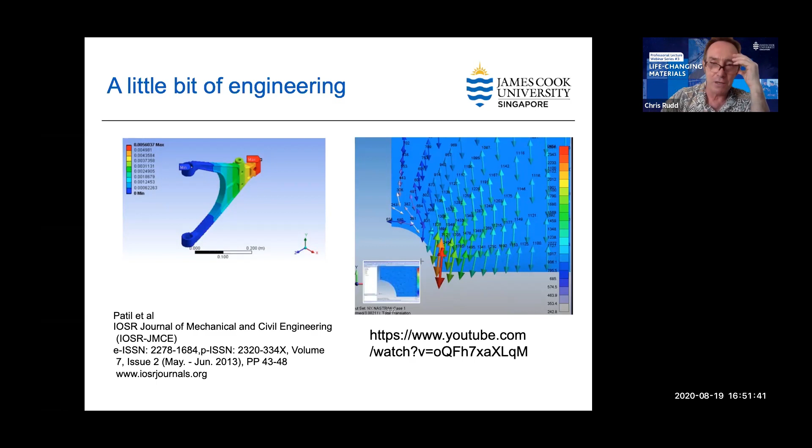It led me to completely change my technical interests from thermodynamics, which I'd been working on before, to these kinds of materials, fiber reinforced materials, where you played around with the direction of the fibers to change the properties of the material. It felt to me like, as an engineering designer, you were playing God with your material.

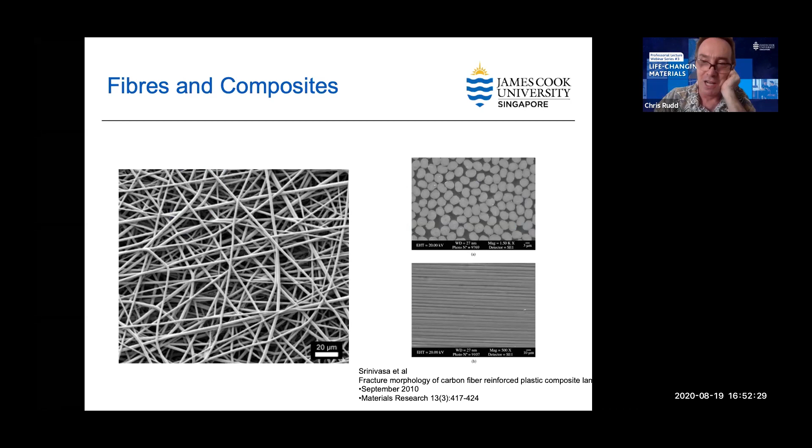I didn't know that just before this session Abhishek was going to be sharing on Formula One structures. So I now know he's got lots of bits of carbon fiber reinforced plastics in his shed, if he's got a shed, or in his desk drawer or somewhere. And that's exactly what these materials are. We will come back to them a bit later on.

I had the privilege to be involved with development of these materials when they were going through a terrifically exciting expansion. I started working on composites in 1985, and if you look at the growth of carbon fiber composites in the aerospace industry, going from about 5% of an Airbus aircraft to more than 53%, you can see how much the market has grown and how much carbon fiber composites have gone from being a kind of exotic discovery material to being a mainstream engineering material.

So when we take a flight in an A350 or Boeing Dreamliner, we are relying absolutely on structural composite materials.

Karen asked me about a particular example of advanced composite materials. This is one of the incarnations of my research group back in the mid-1990s. If anybody can guess what the vehicle is, I'm very happy for them to take a pot shot at that in the chat function. But this is a carbon fiber vehicle body side that we developed in our lab in Nottingham.

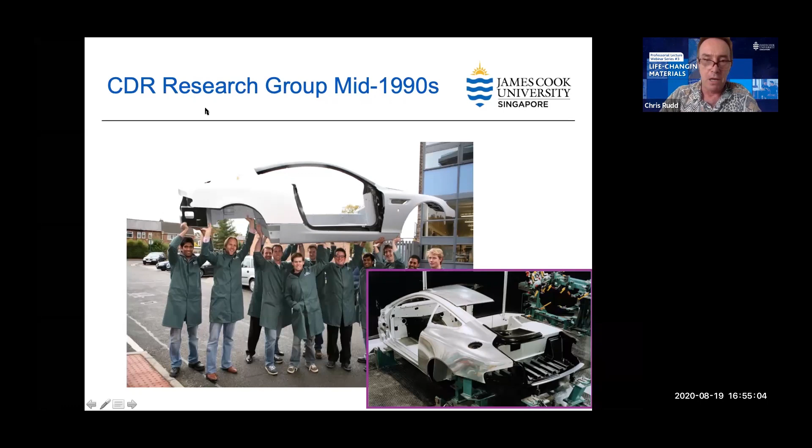But I want to dive back a couple of thousand years, because I want to look at the early development of new materials and find the roots of our noble calling. I think you've got to go back to the alchemists. The alchemists were working not just in Europe, but also in Central Asia and East Asia, where they had these completely undeliverable but very universal aims: the transmutation of metals, turning lead into gold, creating an elixir of immortality, creating a universal panacea to cure all diseases, and the development of the universal solvent.

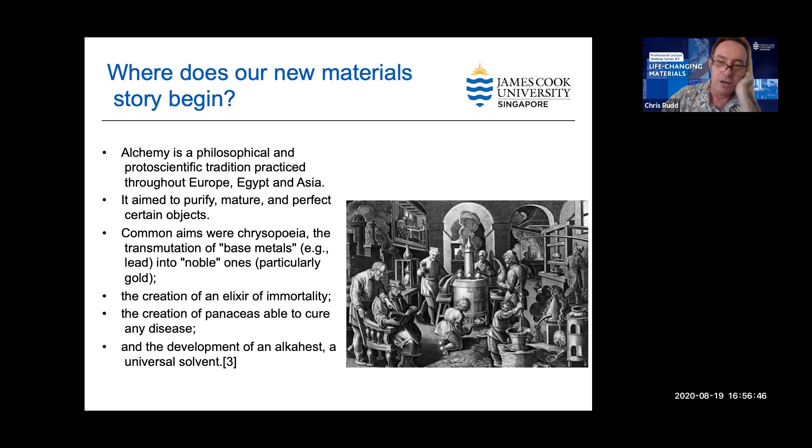And of course, most of it was a complete waste of time. But was it? Because some really extraordinary discoveries came out of that in the pre-Christian times. Some really amazing chemistry done in what is now modern Iran, and many incredible discoveries in the early dynasties in China - I'll mention some of those later. But more than anything else, I think alchemy provided the basis for modern chemistry and modern pharmaceutical sciences. If I've got time, I'll come back to those themes.

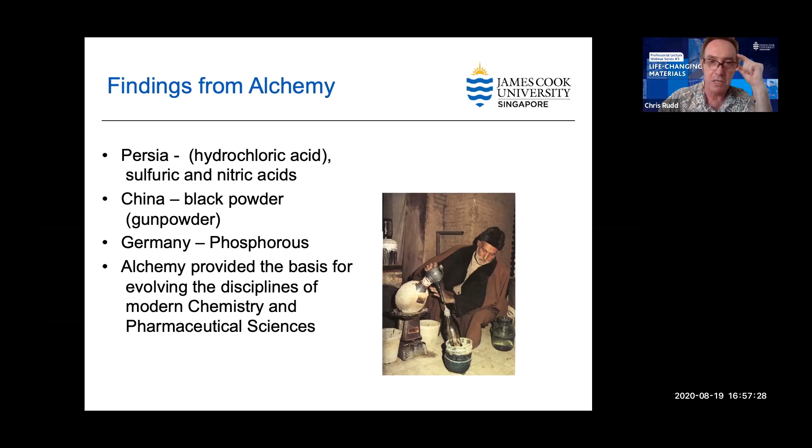So here is another question for you. What, in your opinion, which new material do you think has had the biggest impact on civilization, whether that be positive or negative? Let's pause on that and look at the chat for some interesting suggestions on the most important new material, how it influenced society, and where it came from - because there's no uniquely right answer to that.

So we got plastics from a few people. Putting my hand on my heart as somebody who's been involved in the development of new polymers, I take some responsibility for the fact that some of the influence of plastics has been and is pretty horrible, and we'll come back to that.

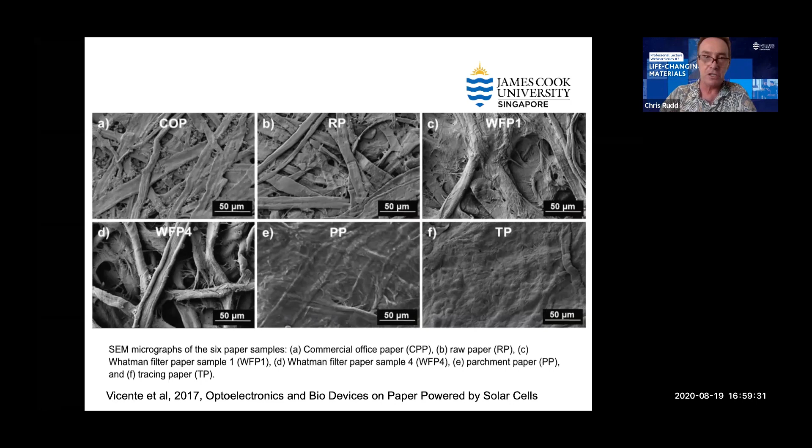And for me, it is this stuff. Scientifically, it is cellulose fibers bound together by a clay and polymer matrix - it's paper. It exists in different forms, can be made from different sources, and has been around for a couple of thousand years. But I think paper is probably, arguably, the first important synthetic material.

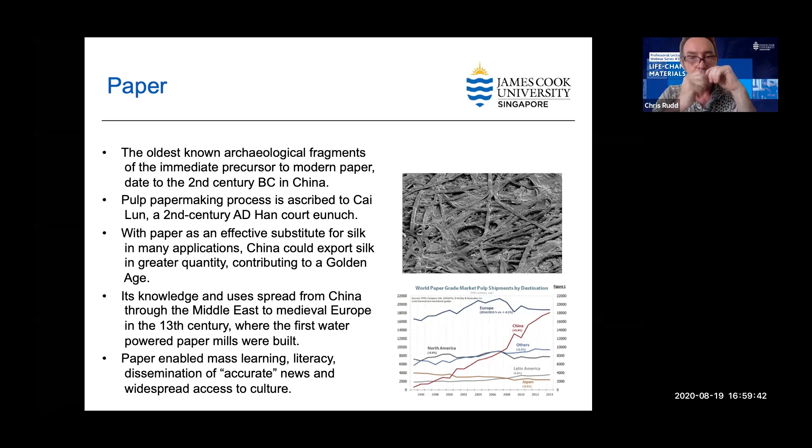It probably goes back a couple of thousand years in China, although it's almost certain there were parallel inventions in other societies - we can think about ancient Egypt and their use of paper-like products. But paper was important for a couple of reasons. First of all, it was really important for China at that time, because people were writing on silk. Once the Chinese started writing on paper instead of silk, it meant they could export their silk and produce huge export earnings. So the invention of paper was indirectly responsible for China's first great golden age.

It actually took quite a long time to spread universally, at least into Europe. But once it did, paper enabled mass learning, literacy, the dissemination of news, the dissemination of scientific findings, and the democratization of knowledge. So for me, that's why paper was a real game changer.

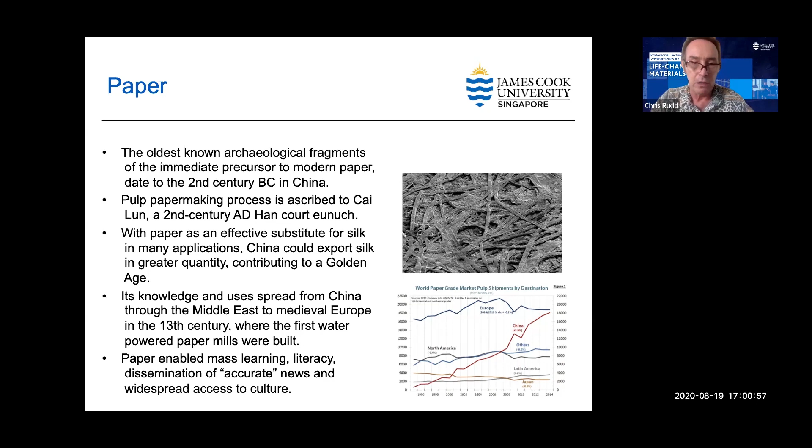And of course, China was a great source of new technology, particularly new materials technology. I already mentioned gunpowder or black powder, but I think the next most important development that came out of China was porcelain. Probably not many people know what porcelain actually is, but it's not a clay - it's a technical ceramic, made by a fairly sophisticated blend of different minerals, which are then fired like a clay to make a technical ceramic.

So unlike materials like terracotta and other mined clays, porcelain has got a controlled porosity. It's relatively tough, and it's got a very high temperature resistance.

And for that, it has been used in a lot of really fundamental new technologies, like in high current electrical insulation. And really crucially at this time, it was the material used as filters in the first virology studies done in the 19th century. Virology is a discipline which, of course, is enjoying very much the public attention at the moment because of the present pandemic. We will come back to the role of new materials in controlling virus spreading a bit later in the talk.

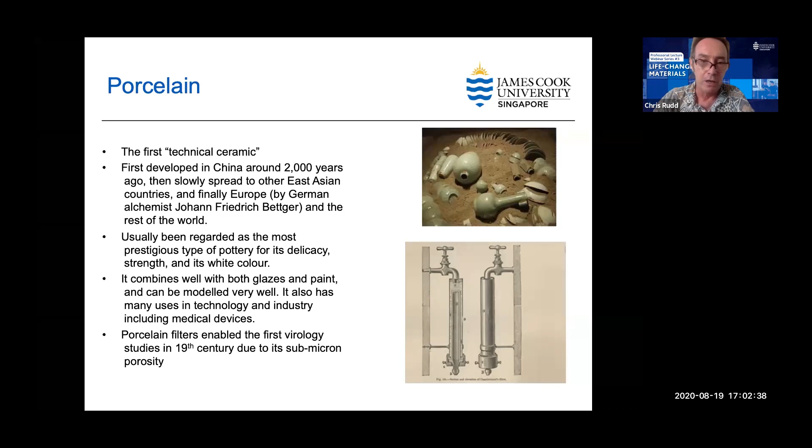So if we want to look at modern new materials instead of ancient ones, we've got a huge range of different materials to pick from. I just want to look at a few that I think are particularly significant in the way they've changed our lives within a generation, and the first one has got to do with energy.

As population continues to grow, especially in tropical regions, and as populations continue to urbanize, our energy demands are growing and growing. The number is probably pretty meaningless, but 650 million terajoules by 2035. It's worth pausing to think that there's absolutely no way we can deliver that with conventional energy sources. Fossil fuels aren't going to go anywhere near it. Wind isn't. Tidal isn't.

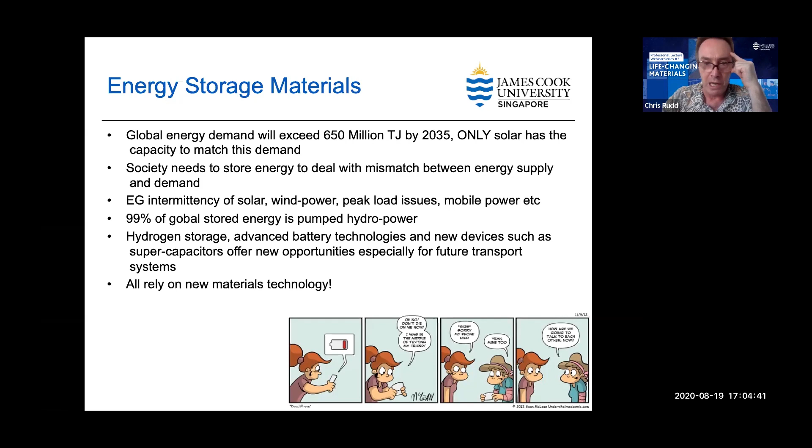The only thing that can get close to delivering that in a sustainable way is solar energy. Of course solar energy is great because it's, in inverted commas, free, but like all the so-called renewables, it's intermittent. We only get a decent level of output when we're in daylight hours, when the sun is shining at a reasonable angle on our solar panels. But all the ways of capturing, storing, and converting solar energy rely on materials technology.

The first bit of technology we need is capture technology. Solar panels, for the last 20 years or so, have been a common sight in our countryside, on our buildings, even on our mobile devices. But actually the photovoltaic effect was first published in 1859. That's like 150 years of technology incubation to get from initial discovery to deployment in the mass market. For the important materials technologies we use today, that's very often the case - we're looking at 100 years to get from the lab into the factory and onto your car, vehicle, or boat.

The other thing to say is, actually, the technology on the roof of your house is pretty rubbish. And why is it rubbish? Because it's only capturing about 20% of the incident solar energy that's radiated onto your panels. Why is that? It's simply a thermal effect - when the sun shines on your panels, they warm up, and as they warm up, they become very inefficient because of the crystalline silicon they're based on.

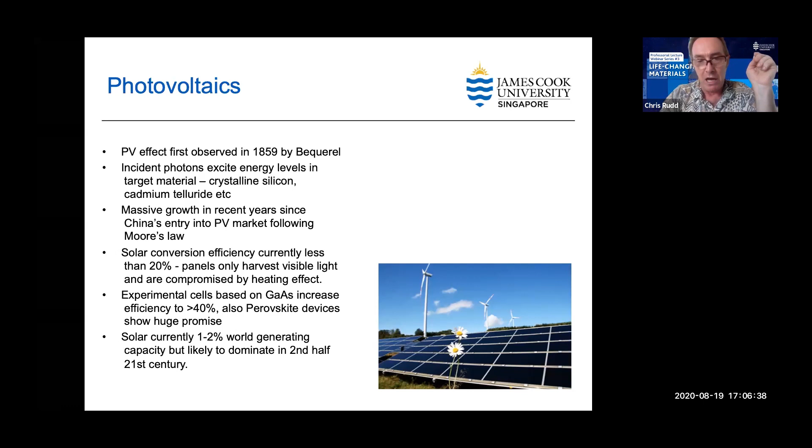Of course, it's very promising that there are new materials based on gallium arsenide and a mineral called perovskite that will probably, in our working lives, double the output of any solar panel, which is really exciting.

But the next thing is, what about this supply and demand issue, and the fact that you've only got energy output when the sun's shining, when the wind's blowing, or when the tide's running. Put it this way - if your household electricity was directly coupled to one solar panel, however big it is, that means you can only watch TV, use the internet, heat water, or run your charging devices when the sun's shining. How useful is that? Not very useful at all.

So as well as finding ways of efficiently capturing energy, we've got to be able to store it and release it quickly on demand. The way we've done this classically at a macro level is by something called pumped storage, where we take a reservoir and use massive pumps to pump water up a hill. Then during times of peak demand, we let the water run back down and use it to generate electricity through a water turbine. It's super basic and not very efficient.

The other thing we do is store energy at a micro level with lead acid batteries, which is slow, polluting, very low power density, and not a great environmental solution. Imagine a phone battery that would charge in one second - we'd all go out and buy one, right? The answer to problems like that are devices that rely on new materials, sometimes called supercapacitors or supercapatteries, using materials like carbon nanotubes and graphene, which have massively high surface area to charge and discharge in seconds instead of hours. That's a really exciting development.

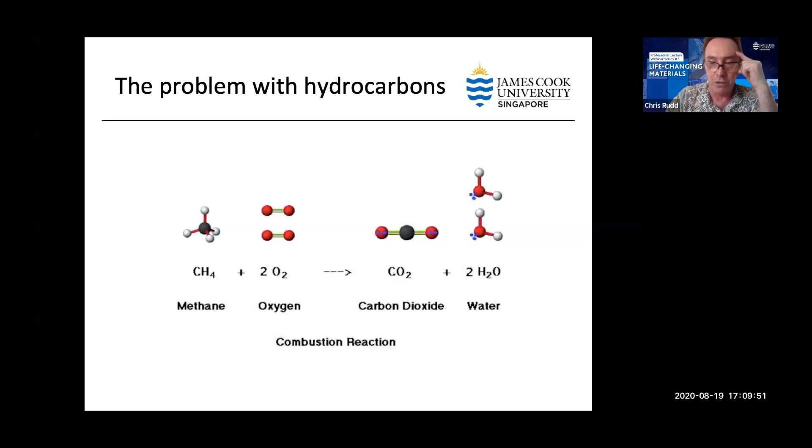But let's not talk about a hydrocarbon reaction, let's talk about hydrogen. If we took that same hydrocarbon gas and instead stripped out the carbon, and burned the hydrogen, what have we got as a byproduct? Something we can drink, right? Nothing but pure, clean water. And that's when people talk about the hydrogen economy and hydrogen fuel cells.

That's what they're talking about. A device that could give us a pretty high power density with no pollutants, but instead of giving us heat as the product, giving us electricity as the product, because we do the combination with oxygen in a very special way. We do it by ionizing the hydrogen and ionizing the oxygen and using the electrons that are freed from that ionization process to drive an electrical load.

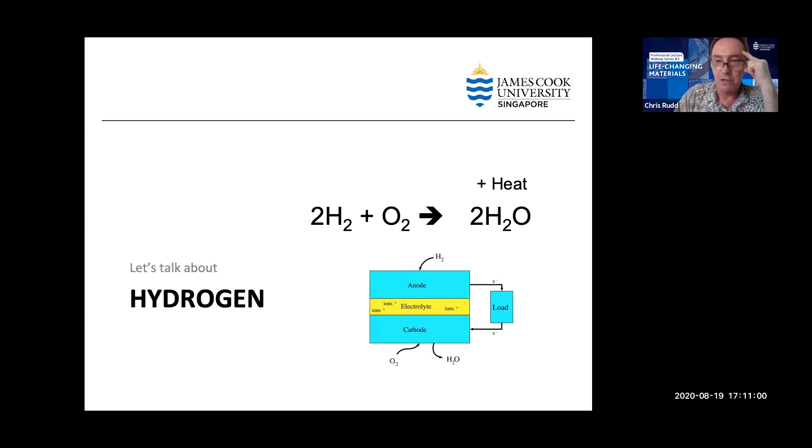And that's the basis of a fuel cell, and it's dead simple. You take a device that you pump hydrogen in one side, you pump oxygen in the other side, and you've got an electrical output. So if you like, it's a battery that doesn't have the consumable metal anode and cathode, but all it's producing is electricity and water. It's a little bit more expensive than a conventional battery because we've got platinum and nickel as electrodes, but it's clean power, and it's clean power with a super high density compared to even a lithium ion battery.

But the question is, how do we store our hydrogen?

If anybody is old enough to remember being told about rationing by their parents or grandparents, they might have seen imagery like this, where during World War II, buses and cars were driving around town with these great big gas bags on their roofs, and they were using gas bags to replace the petrol tanks, and they were using town gas, which wasn't rationed, to drive their engines to replace petrol, which of course was subject to rationing.

So can we do the same thing with hydrogen? Well, in principle we can, but spot the problem.

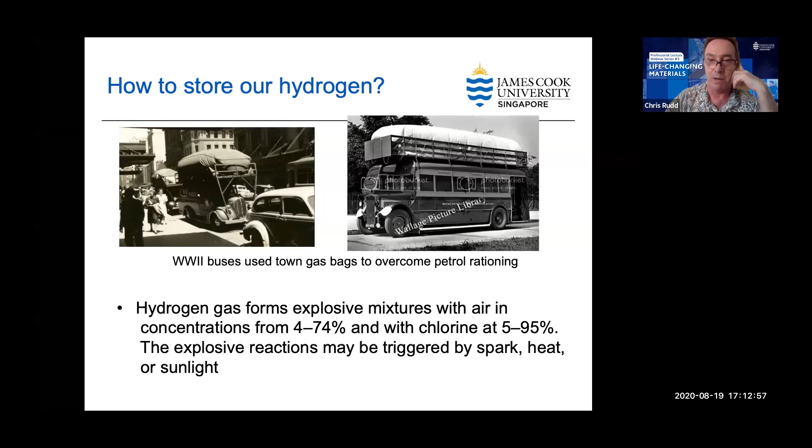It's even also rumored that the canvas that the Hindenburg was covered in was doped with a compound called cellulose nitrate, which, if anybody was reading the news recently, is similar to the material that was responsible for the Beirut explosion.

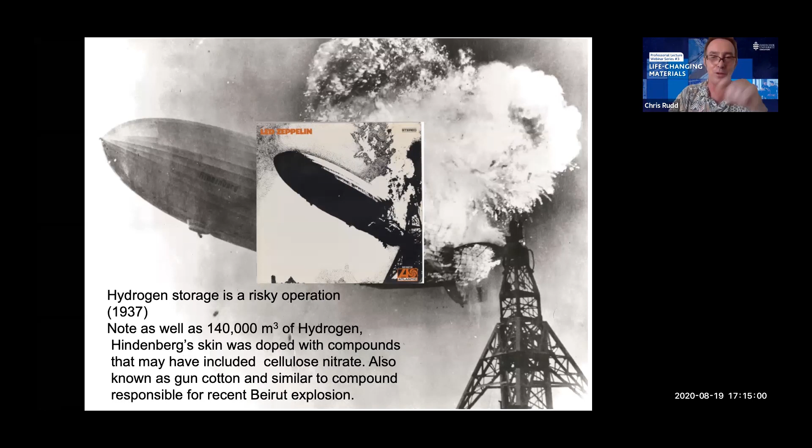Yep, and it was, of course, on the album cover. It was nicked for the album cover of the first Led Zeppelin album, which remains, I have to say, in my collection.

Okay, so storing hydrogen is pretty tricky. You could store it as a liquid, but then that needs to be maintained at minus 240 Celsius and a couple of hundred atmospheres of pressure. So you're not going to want to have that in your car, and you're not going to be allowed to have that on your personal mobility device or carry it on the MRT or anything like that. So instead, material scientists are developing and have developed porous solids like carbon nanotubes and metal hydrides that will somehow absorb that hydrogen and store it at super high densities safely and at room temperature and at ambient pressure. So another important contribution from material scientists in terms of delivering new energy materials.

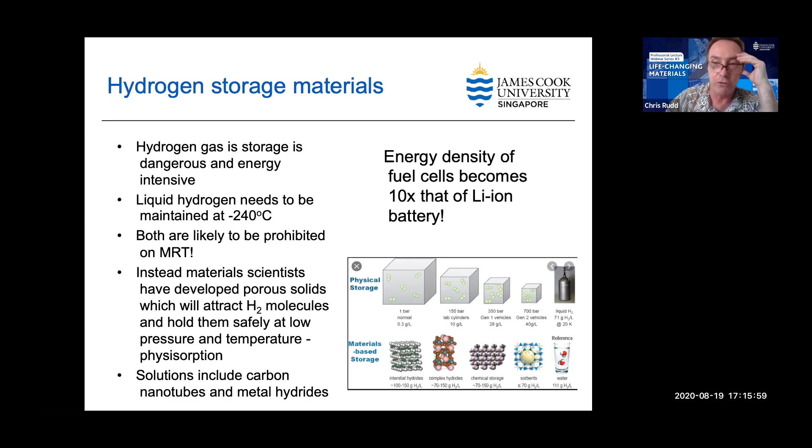So now let's talk about saving energy. And I mentioned the huge contribution that electrical lighting has made to our society, and it has enabled universal education at home, road safety, personal safety in urban settings, and most of it now is LED.

So in which year did you buy your first LED light bulb? And does anybody know, without resorting to Google, when the LED was first invented?

So we're not getting any LED memories yet. I reckon that I bought my first LED in about 2012, and I reckon it probably cost me about 5 GBP.

Here's the thing: the first LED was actually developed in 1927. What about that? That's a material that's taken about 100 years to get from lab into serious commercial production. And why is that? It's a very simple reason: for about the first 70 years of their lives, LEDs were only available in red, and it's only a certain category of user that wants a red LED. It was only in the 70s and 80s, when material scientists started developing ceramic coatings for the semiconductors that enabled them to emit not only red spectrum but first blue and then white light, that it realized its commercial potential. And of course now, massive commercial market, massive impact on energy savings and all of our lives.

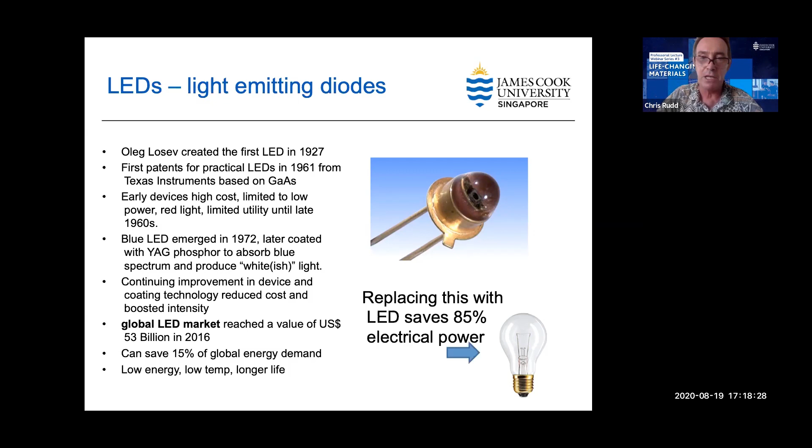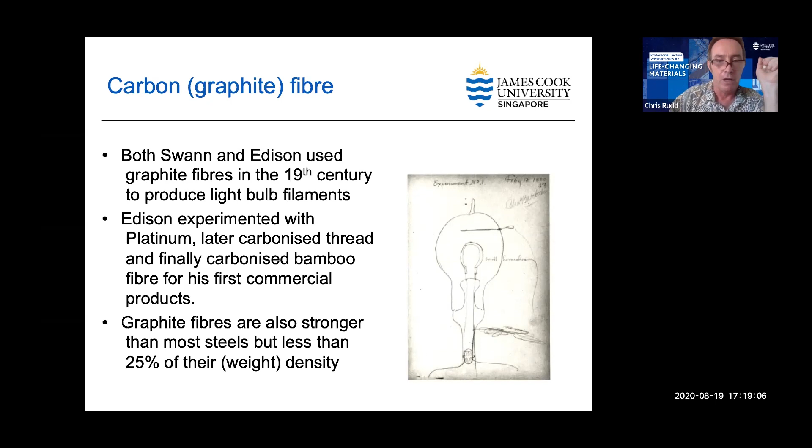If we talk about electrical lighting, it leads me back to one of the things I came in with, and that is back to my old friend carbon fiber. Carbon fiber was an important enabler of electrical lighting, because Swann and his English co-inventor Edison - Edison and his English co-inventor Swann - both used graphite fibers in their proto light bulbs. And that helps us to bridge into the use of carbon fibers in structural materials.

I'm really grateful to Abhishek for mentioning this during the staff sharing earlier on, because he introduced the idea of carbon fiber composites as structural materials when he showed us those black bits of F1 cars that he had picked up after F1 crashes. This is a material that's only been around since 1960, and it relies on the alignment of graphite chains along the axis of a very small fiber that we looked at in the earlier picture.

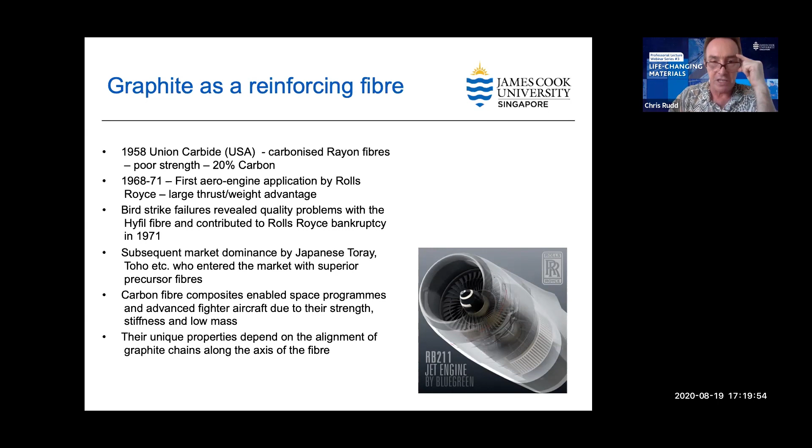One of the amazing features of carbon fiber is not just its specific strength and its specific stiffness, but the fact that it can absorb a heck of a lot of energy. And the reason why most of the F1 crashes that Abhishek showed us earlier on involve their drivers getting up and walking away is because they've got carbon fiber crash energy absorbing structures. The reason carbon fiber composites are so good at absorbing energy in an impact is because when they get crashed, you absolutely destroy every last atom of that material.

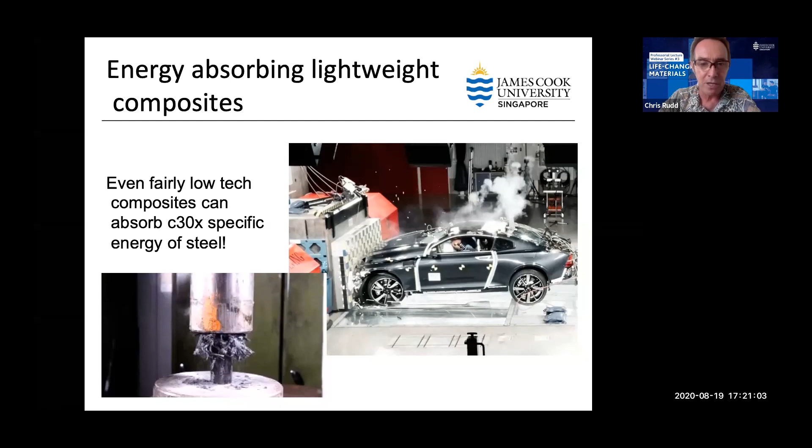If you put a Coke can or an aluminium can in place of that carbon fiber cylinder that's being shown there, when you crush it - and you can hear me crushing a can here - then it buckles. Buckling is a really inefficient way of absorbing energy, but crushing is really, really energy efficient. That's why carbon fiber composites are so much better than any metals you would ever find for an F1 car. You'll see the same thing: carbon fiber composites are now ubiquitous in consumer goods like fishing rods, skis, high-end road bikes and so on.

I'm sticking with advanced structural materials and accelerating towards the end here now. Let's talk about aerospace again, because remember those happy days when we used to fly, and we would fly on an aircraft that was powered by a jet engine. And a jet engine, whether it's a turbofan or whatever type of gas turbine, relies on gas turbine technology.

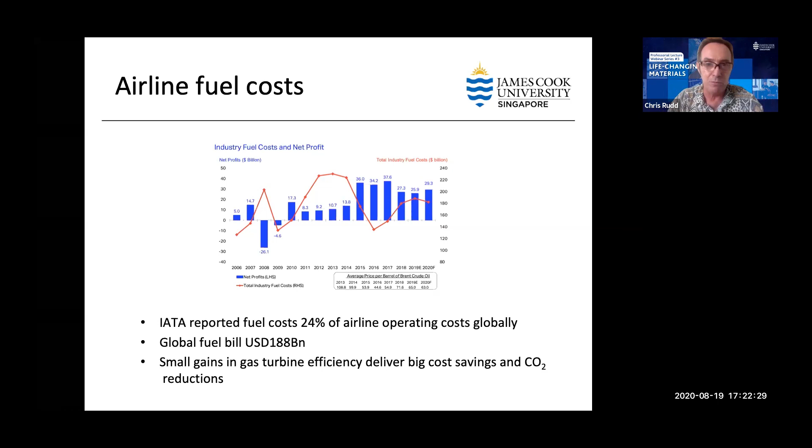Gas turbines burn a lot of fuel. If you look at the global airline industries, 24% of the airline costs in a normal year involves kerosene - so we've got a global fuel bill of $188 billion. So if we can make a small gain in gas turbine efficiency, then we will save the global aerospace industry's cash, and we will save ourselves as consumers cash. And that depends on engine design.

Engine design depends on one critical factor: the operating temperature of the gas turbine. When you look at the engine on any aircraft, what you normally see is the fan, those big black blades at the front. But the really important bit is the hot end, as engineers call it. It's the gas turbine, which has a wheel with a bunch of gas turbine blades on it. The hotter we can run the gas turbine, the more efficient the thermal efficiency will be.

And here's the scary thing. When you take your next flight on any commercial airliner, the gases that go into the turbine enter at about 1350 Celsius. The nickel alloys that the turbine is made of have a melting point which is about 35 degrees lower than the gas temperature. So think how terrifying that is - not only are your turbine blades within a few degrees of melting, but the gas inlet temperature is actually hotter than the temperature that would cause those blades to melt in a furnace.

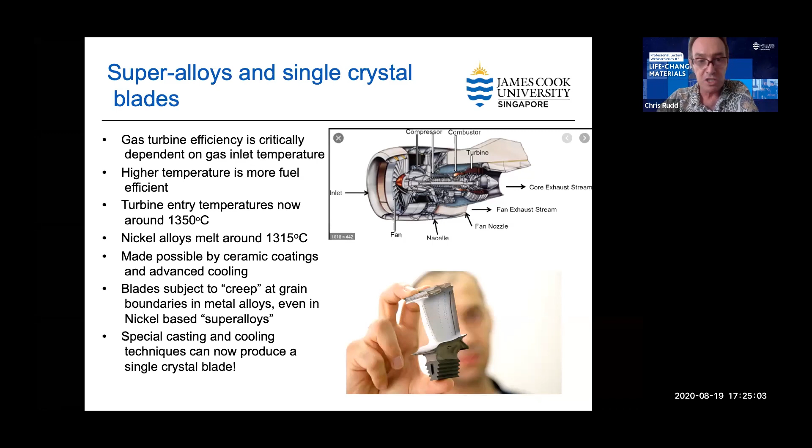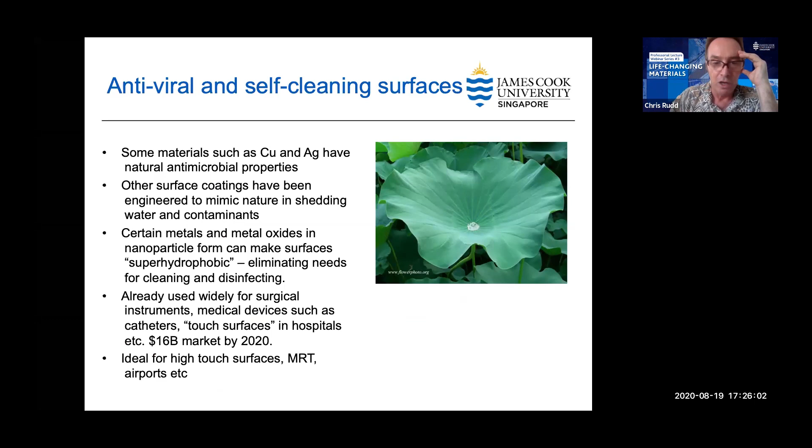Getting towards the finishing line, very topical - another very topical issue is the idea of antimicrobial surfaces. We're all going around trying to open doors with our elbows at the moment. What about if we had an antimicrobial, antiviral surface that would naturally kill or shed bacteria or viruses, using the idea of the lily leaf, the water lily, which has this kind of hydrophobicity due to natural surface engineering. Already we've got devices using that same technology in hospitals, on medical devices, and probably quite soon on an MRT station or car near you.

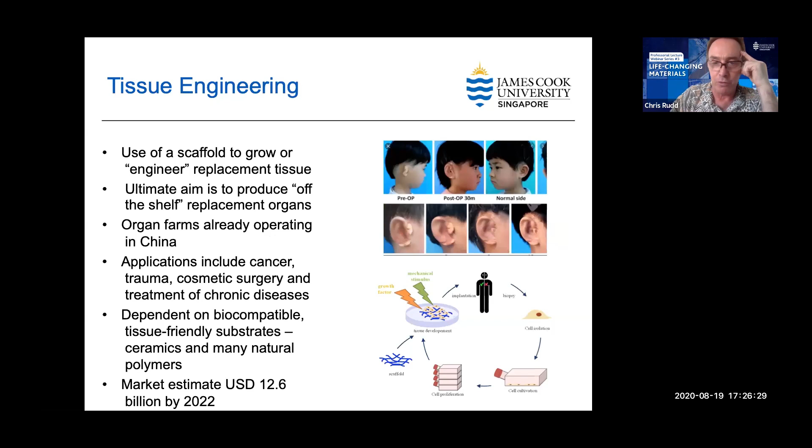We've also got engineering materials being used for tissue engineering to grow new organs, to assist people who've got congenital defects and provide them with organ-farmed implants that will help them either have a higher quality of life or extend their lives. We've also got resorbable medical devices that use materials technology to resorb inside the body.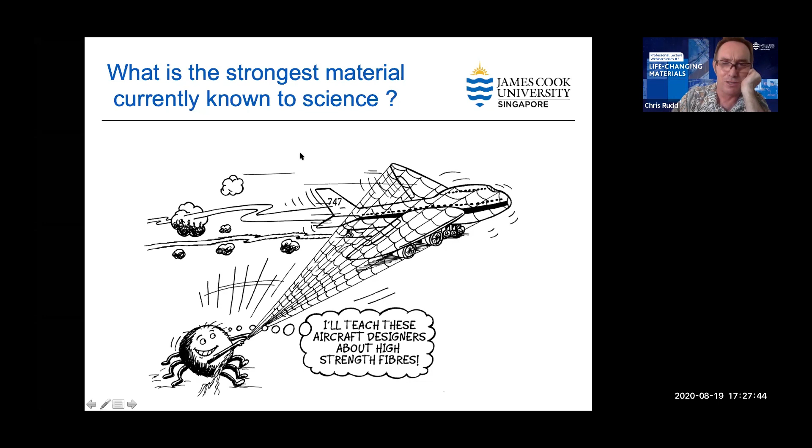Nanotubes, carbon nanotubes would have been right about probably 15 years ago. Liang is saying graphite, which is kind of almost right. And the answer is - oh no, Karen, not titanium, no. It is, of course, a single atomic layer of graphite.

And what do we call that? We call it graphene. Graphene is interesting from lots of different perspectives. It's got the highest melt temperature of any known material. It's got the highest tensile strength of any known material. It's got the highest thermal conductivity of any known material. It's got the highest electrical conductivity of any known material.

Graphene has been known for quite a long time, but it became really big news when Geim and Novoselov won the Nobel Prize, I think it was like 2010 or something. So now graphene is a commercial proposition - it's being used in electrical devices, for rewritable paper, and stuff like that.

Interestingly, our friend Novoselov is now a Singaporean. We all know that Singapore doesn't actually make anything if you can buy it, so I think about 3 years ago it bought Novoselov from Manchester, where he now runs his lab in NUS.

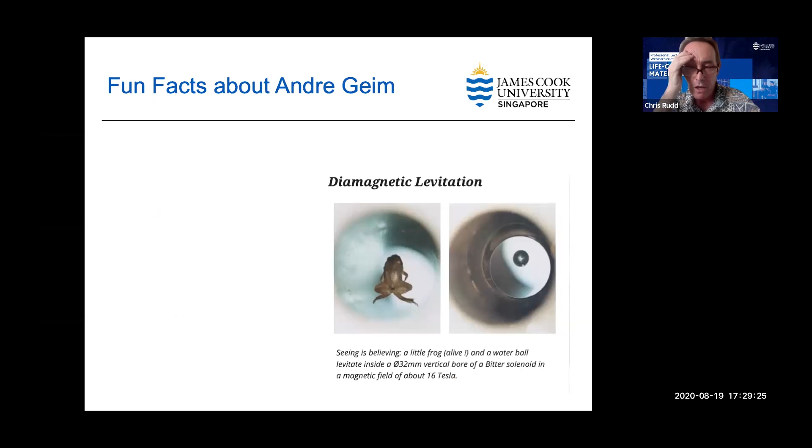Just wanted to share a little bit of fun about his partner in crime - fun facts about Andre Geim. Andre Geim, 5 years before he won the Nobel Prize, actually won the Ig Nobel Prize. And he is, I think, the only living scientist to hold both a Nobel Prize and an Ig Nobel Prize.

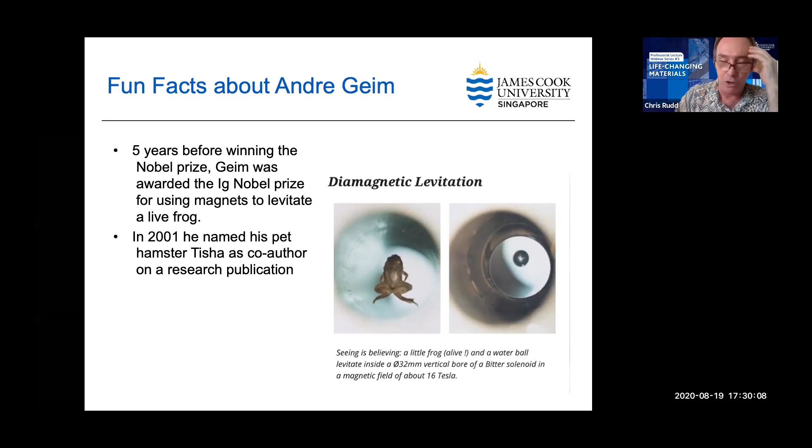And he won his Ig Nobel Prize for carrying out magnetic levitation experiments with a live frog in a 16 Tesla magnetic field. If you go on his personal website, you'll also see there are other interesting things about Andre Geim, in that in 2001, before the Nobel Committee honored him, he also named his pet hamster as a co-author on

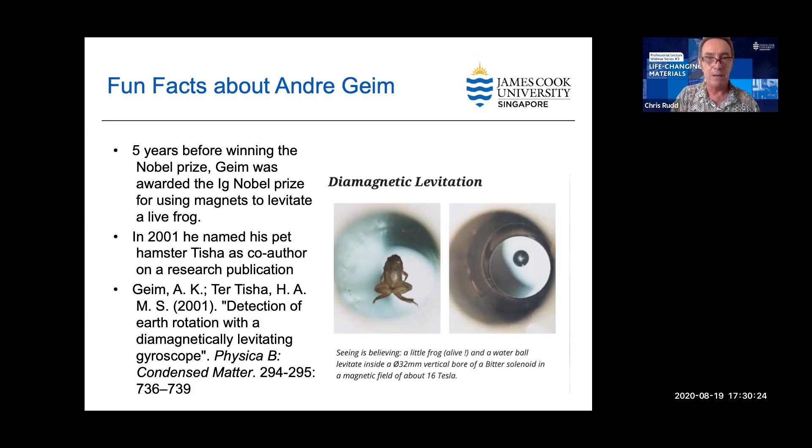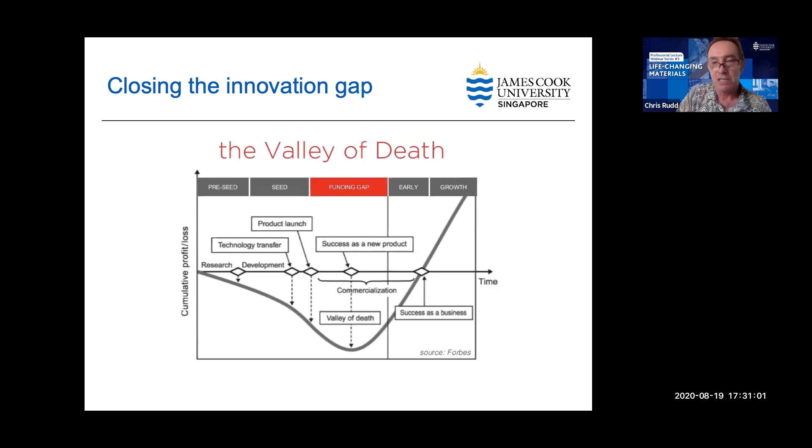Okay, let's wind up. What can we learn from all of this? I think the key lesson is that of course we rely on materials as everyday citizens, but those materials will only have an impact on society if we can make useful devices at an affordable price. And many of the things that we rely on as technology solutions today were around like 150 years ago, and many of them were discovered by accident.

They suffered the same problem with the valley of death that any other technology innovation suffers from. What made the difference for the materials that did succeed? I think I've mentioned a few things. One is better instruments, better ability to do high throughput screening, more digital control, better connectivity between researchers, so communications technology, fast moving electronics industry that was kind of driving a lot of this development, not just in university labs, but in industry as well. And of course, an increasing need to manage finite resources.

Who does all this stuff? It's not just material scientists, it's also chemists, mechanical engineers, physicists, pharmacists, food science people. It's basically people like you.

And maybe, if you've got a few minutes, Karen, for discussion: if you could invent a new material tomorrow, what would it do? A few things that occurred to me.

Well, pretty high up the list has got to be antiviral protection, carbon capture and storage, producing fuels from crop waste or municipal solid waste, of course accelerating the production of new human organs, digesting marine plastics - I know that you would vote for that one, Dean. And if we had time for part 2, I would show you some interesting solutions to that. Reseeding marine coral, we've also talked about with our JCU colleagues. Producing affordable proteins with a low carbon footprint. Or maybe just replacing you in your next Zoom meeting.